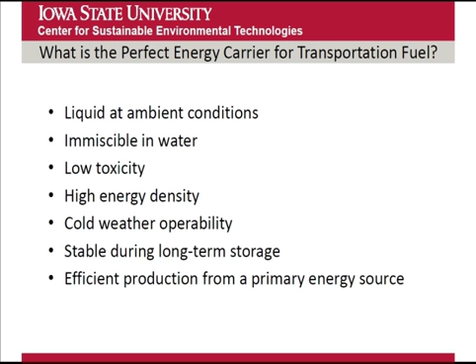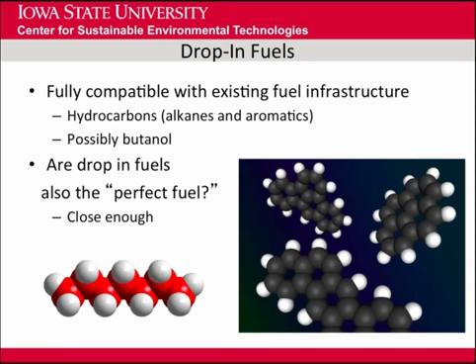It's high density. We want it to be able to operate in cold weather. That's my introduction to what the perfect fuel is, and we have what we call drop-in fuels, which are fully compatible with existing fuel infrastructure. This does not include ethanol because it is not perfectly compatible with the gasolines that we use. So a drop-in fuel should be a hydrocarbon, or it possibly could be a higher alcohol like butanol. Or do these fit the definition of a perfect fuel? My answer was it's close enough.

So we want to produce a fuel, but we need to know what we're going to produce the fuel from. There are three kinds of biomasses. These can be utilized either from a biological process like fermentation or the thermochemical process. I think it's important to recognize what our choices are, and these include lipid-rich biomass, which I'll describe a little bit more, lignocellulosic biomass, and waste biomass. Waste biomass is just a combination of lipid-rich and lignocellulosic, and paper and leaves from your yard. It's all kinds of possibilities. I'm not going to talk about that too much.

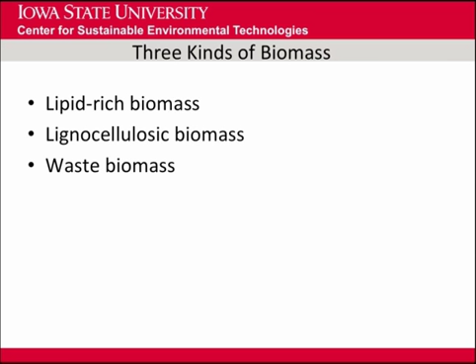And so using biology to break down lignocellulosic biomass is a very daunting task. And that's one reason I advocate thermochemical, because that's one thing nature has devised, a fire, to break down lignocellulosic biomass.

Lipid feedstocks are really a neat feedstock in that they are almost hydrocarbons. This chemical formula shown here is the structure of something called triglyceride, which is found in soybeans and microalgae. If you start counting up, you'll see a lot of carbon and a lot of hydrogens, and you'll see only a very rare oxygen molecule, O, on the right side of the figure. It doesn't take too much effort to pull those O's out, and once you have the oxygen out, then you have a pure hydrocarbon. So that's the beauty of these lipid feedstocks.

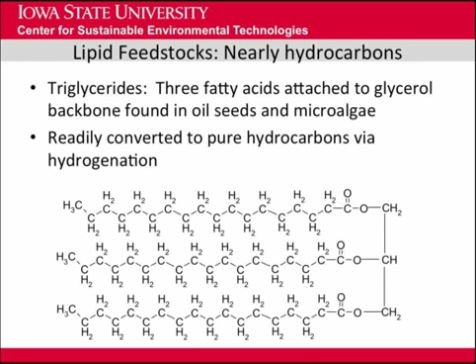Now the question is, should we be using lipids or should we be using lignocellulose? From what I've described, it would seem like we ought to be focusing on the lipid feedstocks.

This is to illustrate that if we want to produce lipids versus hydrocarbons, if we start with carbohydrate, shown by the chemical formula in the upper left, we have to put it through plant number 1, which is something engineers build. What they do is extract oxygen off the carbohydrates in the biomass, and at the bottom is shown a pure hydrocarbon. Notice there's no oxygen there. So engineers know how to do that, but plants also are able to do that.

This is the thing to remember: if you want to produce an almost hydrocarbon in a plant, it has a biosynthesis pathway illustrated in blue and pink that involves taking carbohydrate, glucose shown at the top, and going through a cycle that, like plant number 1 on the left, spits out oxygen, in this case as carbon dioxide. It's what we call deoxygenating that carbohydrate, ending up with, as you'll see in the figure, a lipid. So we either can start with lignocellulose and build a plant to do it, or we can grow plants that produce the lipids.

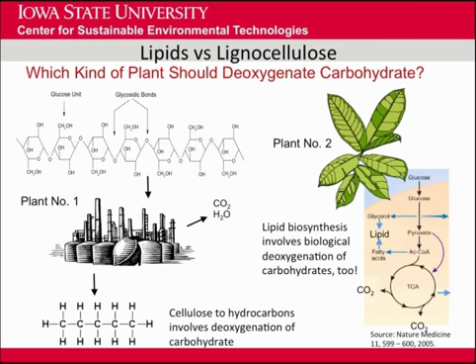But there is energy involved in both of those processes, and I frankly don't know which one is the better process to look at. So that's a decision that will ultimately have to be made.

Now, if you look at the whole renewable fuels industry and all the different approaches, there are many ways. On the left are all kinds of feedstocks we could look at, and in the center are the technologies that could be applied to break them down. At the bottom you'll see biochemical conversion, the idea of using biology to do it. And then there are different kinds of biofuels.

I'm going to focus on hydrocarbon fuels because that fits the definition of drop-in fuels, which would allow us to greatly expand the biofuels market, because we can only put so much alcohol into our vehicles—on the order of 10 or 15%. We'd have to have a lot of changes in engines to get up to 85%. It'd be a lot easier for the consumer if they didn't have to worry about what their fuel was or what their engine could do, and could simply use these so-called drop-in fuels.

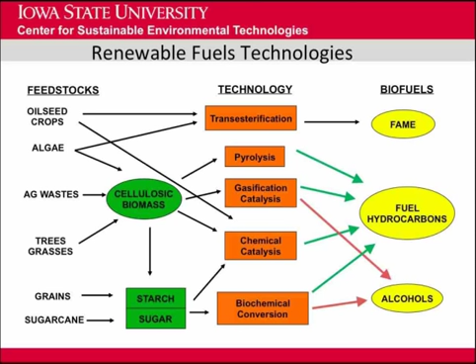So let's talk about thermochemical biofuels. I like to refer to this as the other cellulosic biofuels, because most of the emphasis has been on trying to convert the carbohydrates in lignocellulose into sugars that can then be fermented. We're going to look at two different kinds of substrates other than sugars.

One of them is syngas, which we get through a process called gasification, and on the right at the top is a photograph of a gasifier at the BioCentury Research Farm at ISU. The other approach is to produce something called bio-oil, a liquid produced by a process called fast pyrolysis, illustrated at the bottom right of the figure.

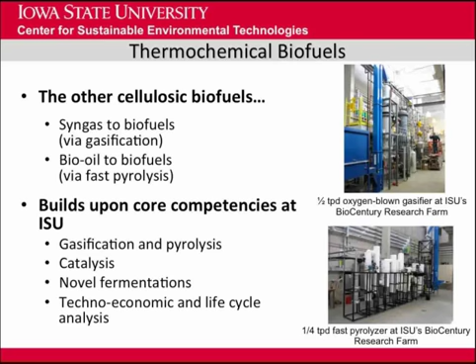That is, we have something comparable to sugars that we then send to a fermenter. But in this case we'll look at different kinds of processes, and we'll call those processes upgrading, to get the desired fuel.

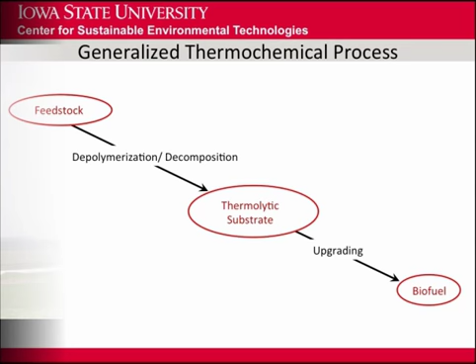So I've mentioned gasification and fast pyrolysis—that's going to be the emphasis of my talk. There are other technologies that in some respects are subsets or generalizations of these, but I'm going to just focus on gasification and fast pyrolysis.

This slide shows the process of gasification, which is the thermal decomposition of any kind of organic matter into flammable gases. It's something akin to combustion, but instead of just producing flue gas, carbon dioxide, and water, it produces flammable gases like hydrogen, methane, and carbon monoxide instead.

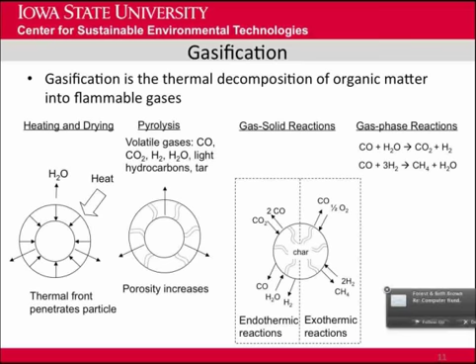The process is interesting in that it can consume virtually any organic feedstock you throw at it. It doesn't care if it's leaves raked from your yard, switchgrass grown, wood, or just about any type of organic material. Here are illustrated two of the major gasification options. There are other kinds of gasifiers, but they tend to be for very small applications. The nice thing about these two reactors is they scale—they scale to plants that could easily be sized at 2,000 tons per day, for example.

On the left is what's called a fluidized bed.

It takes biomass and injects it into a bed of sand that has air injected in the bottom, so it behaves like a fluid, hence the name fluidized bed. Very good mixing, very good heat transfer, and the gases are released and go out through the top of this reactor. This has actually been the reactor that has been used the most with biomass.

On the right is what's called an entrained flow gasifier. It's really a very simple idea. Let's just blow biomass in with oxygen into a hot environment, and as it sweeps along, it turns into a gas, and we can control the temperature with various ways of controlling the oxygen or steam that's put into the system.

Seems like a simple system. It is actually fairly difficult to engineer, and it really works best in very, very large-scale systems. It has not been proven out very well with biomass. It works very well with coal because it turns out biomass is actually easier to gasify than coal. But there is work trying to adapt this to biomass.

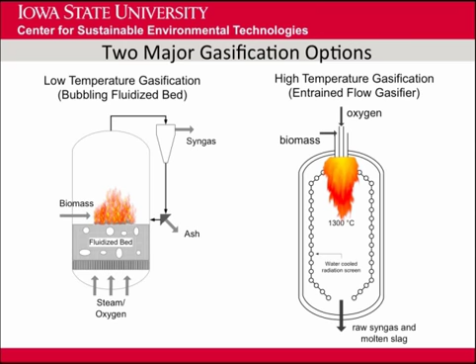The product of gasification is syngas, short for synthesis gas. As I've already stated, it's mostly carbon monoxide. Hydrogen, carbon dioxide is a product, as is methane. Well, that's wonderful because we can use that then to synthesize useful compounds from it.

The difficulty is syngas contains a lot of contaminants, and I've listed here tar, alkali metals, sulfur, nitrogen, and chlorine. It'd be nice if we had one process that removed all of them, but I'm trying to illustrate here at the bottom, it actually takes a separate unit operation to remove each of those. Every different contaminant is going to have a different reactor system that's going to clean it up. And I point that out because that's one of the downsides of gasification: every time you put in a unit operation, you put in a few more million dollars into the operation, and after a while it all adds up to a very expensive capital cost for gasification.

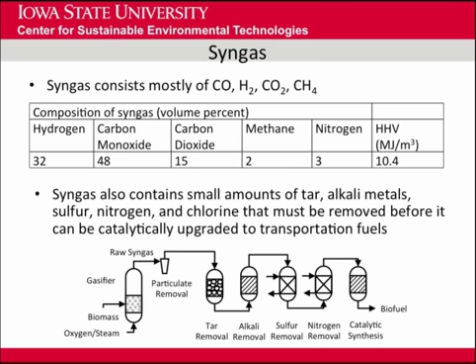But it turns out gasification is fairly efficient. People look at this and think, you're burning this material and you've got to put heat into it, isn't this very inefficient? The answer is no. It actually can be very efficient. Energy efficiency being maximum 100%, we can achieve as high as 95% with certain types of gasifiers. It may be as low as 70 to 90% for simpler types of design.

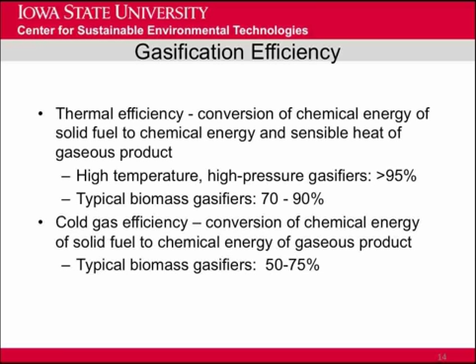I've already talked a little bit about some of the advantages and disadvantages, but I do need to point out that among the advantages is it tolerates relatively dirty biomass feedstocks. Give us those waste streams wherever they come from, this system will consume them and turn it into a useful intermediate. And that intermediate is very uniform. It's just a few molecules that tend to react well together, and so that's an advantage over, say, producing a whole bunch of different sugars or acids or things that often occur in some other processes.

And it works. I have to point out that Nazi Germany, when the Allies denied them access to petroleum in Romania, they turned to their chemists and they built gasifiers. They didn't use biomass, they used coal, and they had a substitute. South Africa, during the apartheid era, they were cut off from sources of petroleum. They built gasifiers, used coal, and they still run those today, even past the apartheid era.

So it works. The disadvantages, as I've mentioned already, you have to clean up the gas stream. Typically, we'd like to operate these systems at high pressures. Getting solid biomass into a pressurized reactor is not a lot of fun. I'll tell you, we've done it. And it adds to the cost. Both of these disadvantages add to the cost, so typically they have fairly high capital costs compared to some of the alternatives.

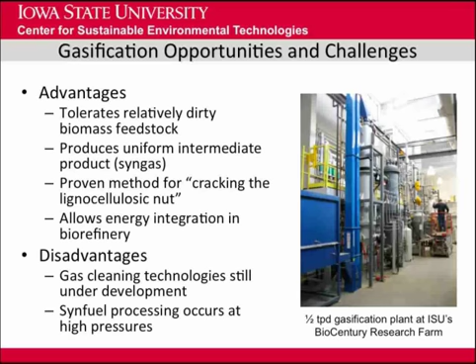Once we have a syngas, we don't want to put that in our engines or even run it into our homes as a substitute for natural gas. It is not of the quality of natural gas. Instead, we want to upgrade it, and there are two basic ways to do that. One is to use a catalyst, a metal catalyst, at moderate temperatures and high pressures, and through a number of different technologies can convert that into liquid fuels.

On the upper right figure is a Fischer-Tropsch reactor that is able to turn this gas into a liquid suitable for transportation fuels. But another possibility is shown here. It's called syngas fermentation. What we actually do is run the gas into a fermenter, and there are appropriate microorganisms that are able to take that gas and convert it into liquid products. One most prominently is ethanol, but it can also produce lipids that, if you recall, are fairly easy to upgrade.

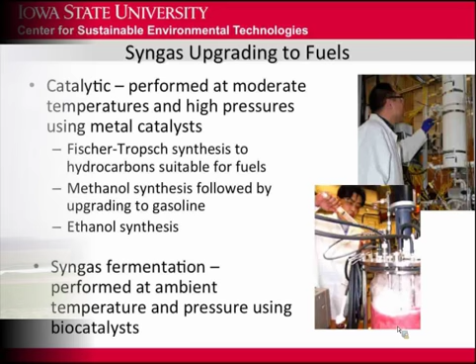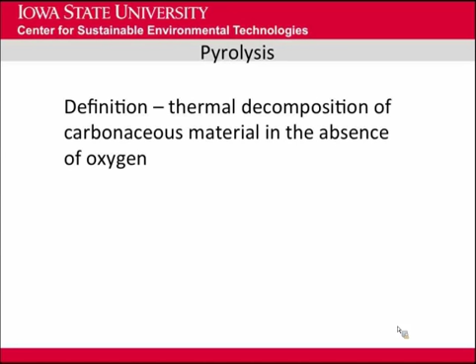So I'm going to move on to pyrolysis. Pyrolysis is actually very similar to gasification. Some people have trouble distinguishing between the two if you just look at the reactors and think about the high temperatures and process conditions. But more generally, we define it as the thermal decomposition of carbonaceous material in the absence of oxygen. With that definition, it sounds like gasification. But what's different is that there is a multiplicity of products. Depending on how we tune the reactor, we get gas, solids, and liquids.

The many phases of pyrolysis - how we control the process will determine the relative proportions of solid, liquid, and gas. The first thing that we can do is called carbonization. This is a very slow process, and the predominant product is charcoal. Our goal is not to maximize charcoal production, but this is the way they used to do it. They would pile up wood, get a fire going, and then they'd cover it with dirt and basically starve the combustion process, and it would go to a pyrolysis mode, and the result was charcoal.

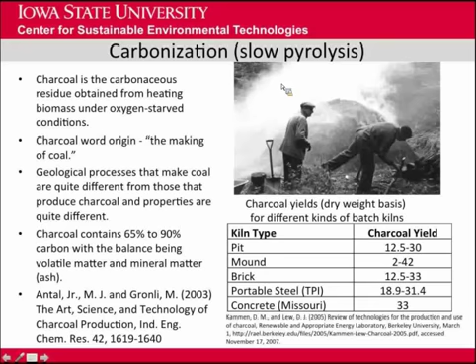But there's another form of pyrolysis that I'd like to focus on, and we call it fast pyrolysis. Instead of occurring over days, it occurs in less than 5 seconds. It's very high heating rates, and the temperatures are a little bit higher than slow pyrolysis, at 500 to 650 degrees centigrade.

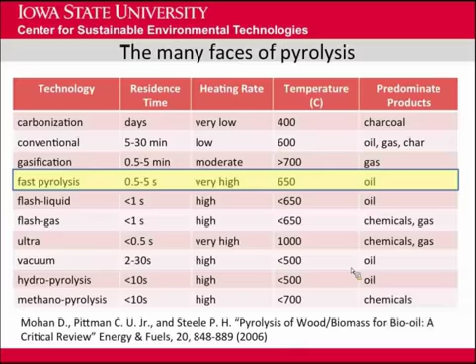And this is the product of fast pyrolysis. It is predominantly an oil product, a liquid product. This looks like petroleum. It is not. It has the aroma, if you will, of hickory smoke or barbecue. Some people like it, and some people don't, because this is a very concentrated barbecue smell.

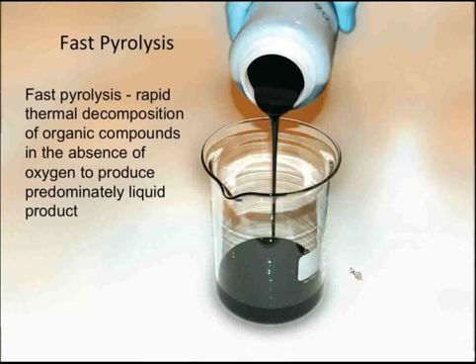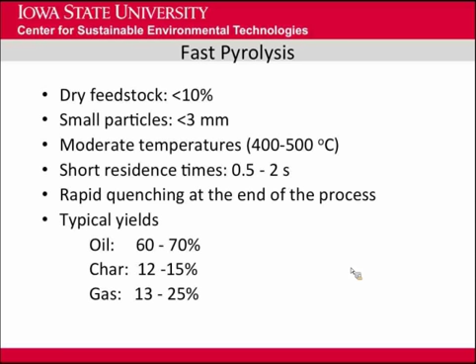Fast pyrolysis, by definition, is a rapid thermal decomposition of organic compounds in the absence of oxygen to produce predominantly liquid product. Contrast this with gasification, which is to produce predominantly gas. So this is a summary of some of the conditions specifically that are required to get liquid predominantly instead of gas. And you can see the yield can be up to 60 to 70% of oil, which is what we want.

Now, if you're really interested in what's in this oil, it's quite a long list, and these are families of compounds, not specific compounds. Saccharides is sugars - anhydrosugars is a sugar that's missing a molecule of water in it. So you can see the total saccharides, if you will, can total up to something like 10%. We're working on some technologies to try to double or triple that amount of sugar production. But there are all kinds of other compounds - this is actually predominantly acetic acid, so a strong vinegar, if you will. Lots of chemicals in there.

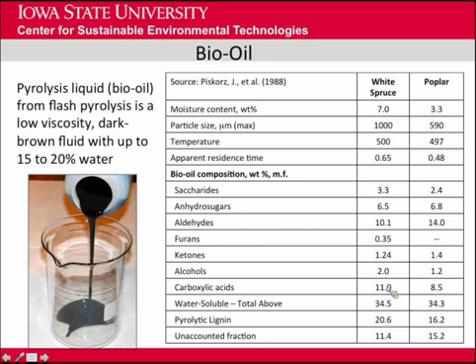And it is also an energy-efficient process. We can convert as much as 75 to 80% of the biomass into this oil with an energy efficiency of 70% or more.

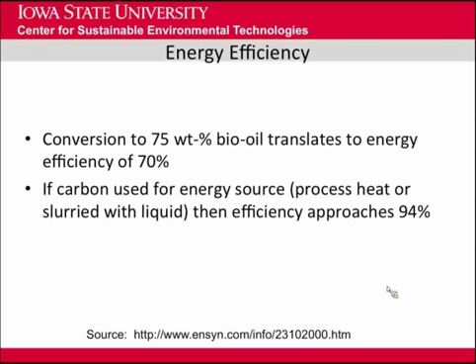I apologize for all the emails coming in this morning. It's been a busy morning already.

Fast pyrolysis opportunities and challenges. Fast pyrolysis is very appealing to a large number of people, whether they want to grow biomass or produce the biofuels. One of the advantages is the oil is very appropriate for upgrading using petroleum refining technology. And so that means we can produce hydrocarbons using existing infrastructure. And since we've spent billions on infrastructure across the United States to convert petroleum into fuels, it would be nice to use this technology to turn biomass into those same kinds of drop-in fuels.

The other very attractive feature of this is we can build these at fairly small scale. Right here is illustrated a quarter ton per day unit. We typically want to scale this up to 50 to 200 tons per day. And you say, boy, it's going to get a lot bigger, but it doesn't scale in volume that as fast.

So this notion that we can build fairly small units, distribute them across the landscape, produce an oil that you put in a tanker truck and move to a centralized facility where you would upgrade it, i.e. to a refinery where you would upgrade it to fuels.

Sounds like lots of important advantages, but there are disadvantages that we're working hard to overcome. One is that there's a lot of water and oxygen in bio-oil as it currently exists. We're looking to drive the water out, and we're looking at catalytic processes to get the oxygen out and make it more stable, because right now it's fairly unstable in storage. It tends to thicken up, which isn't too good if you're trying to pump it around a refinery.

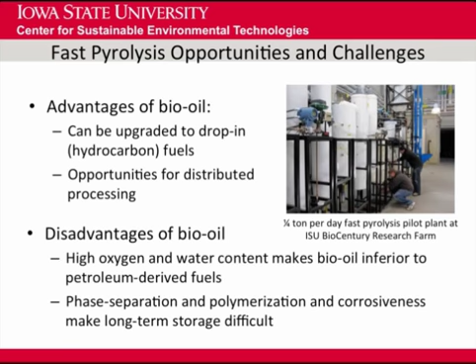The applications of bio-oil - you can use bio-oil as is in stationary power, for example. You just pump it into a burner. We have a faculty member at ISU who has demonstrated that at several different scales.

You can produce commodity chemicals. I showed there's a lot of different chemicals. The trick then is how can you get a purified form of it. There are ways to do that, and we're trying to make some advances in that area. But most of our focus has been on the production of transportation fuels.

I want to point out we can also get lots of sugars and even something we call bioasphalt out of bio-oil. We've got a process where we produce what we call stage fractions, SF1 through SF5. We could increase or decrease that number. What we're doing is driving the water down to the fifth fraction - this is a strong balsamic vinegar, if you will.

These fractions, SF1 and 2, are very dry, and when we wash this stuff, we wash out the soluble part and discover that it is sugar. We get a solution that is so highly concentrated in sugar that we would actually have to dilute it to use it in a traditional fermentation.

We also get the non-soluble part out, and we refer to that as the raffinate. It is a material that is very, very much like the bitumen that is in asphalt. We've actually worked with some faculty on campus where we have formulated asphalt substitutes with this material.

I can't go away from this talk without mentioning biochar. Any thermochemical process rapidly heating biomass drives off volatile compounds, gases and vapors and liquids, and leaves behind a solid residue that you look at and say, well, isn't that just charcoal? Yes, it's charcoal. And this is a scanning electron microscope image of what that charcoal looks like up close.

Generally, we've looked at it as a pretty useless byproduct, and my goal has always been to try to minimize the amount of charcoal that's produced. But we're finding out that this charcoal material has some amazing properties that some early researchers discovered when, in the old days, you used to dump the charcoal out in the back. They found that the plants were growing in this charcoal much better than in the area surrounding it, and discovered it had some remarkable properties in terms of agriculture or horticulture.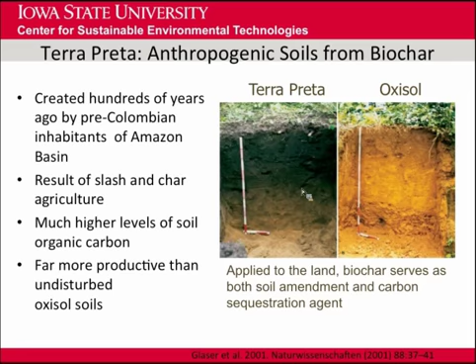Biochar turns out to have both physical and biological effects. Most prominently, it reduces the density of the soil. It improves the water holding capacity. It holds nutrients in the soil better. And it actually reduces the rate of conversion of nitrogen into nitrogen oxides that are emitted into the atmosphere.

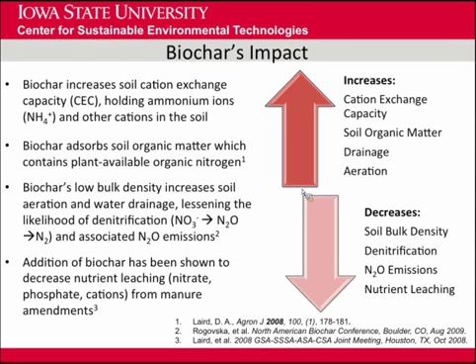For the sake of time, I won't go into these, but I'd encourage anyone as fascinated with this topic as I am to Google biochar or terra preta—you'll discover interesting articles on this subject. This is of interest because it gives the opportunity to improve the sustainability of biofuels agriculture. If we remove large amounts of biomass, we reduce what could be recycled as soil carbon or nutrients removed from the land. By returning biochar, we're returning not only carbon but a variety of nutrients found in biochar, specifically potassium and phosphorus.

I think this is just an extra slide here.

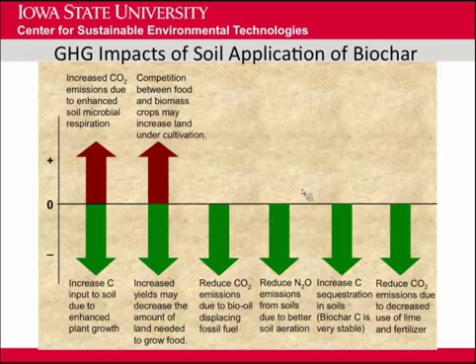Some of my inspiration in this area is a fellow named James Lovelock, who has made a lot of observations on the atmosphere and the operation of planet ecosystems. He recently stated there is one way we could save ourselves: through the massive burial of charcoal. It would mean farmers turning all their agricultural waste into non-biodegradable charcoal and burying it in the soil. There's a lot to be investigated in this area.

Iowa State University has committed quite a bit of effort to that, as has the CenUSA regional project this is part of. I want to end with what's an advertisement for ISU's facilities supporting thermochemical research. Much of our work is done in the Biorenewables Laboratory, shown here, and here are a number of students over the last few years who've conducted research in pyrolysis, gasification, and upgrading. There's also the ISU BioCentury Research Farm, about 6 miles from campus, supporting pilot-scale facilities. Here's our pyrolyzer, and here is our gasifier unit.

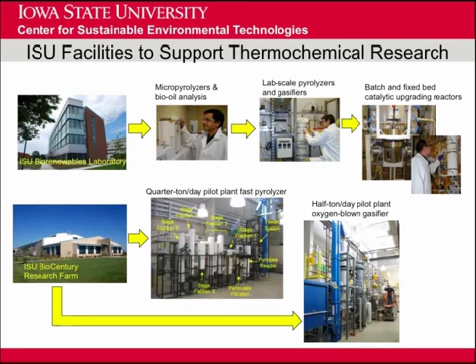There are still a lot of questions to be answered about thermochemical technologies, but we're discovering a growing interest in this area because of its ability to process a number of feedstocks in producing drop-in biofuels.

So that brings me to the end of my presentation. I'd be happy to answer any questions.